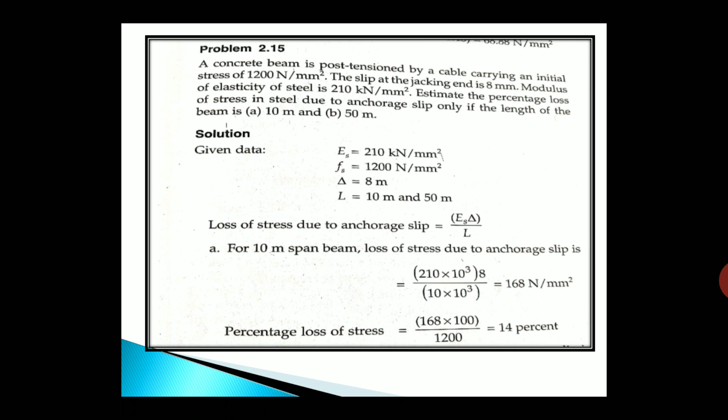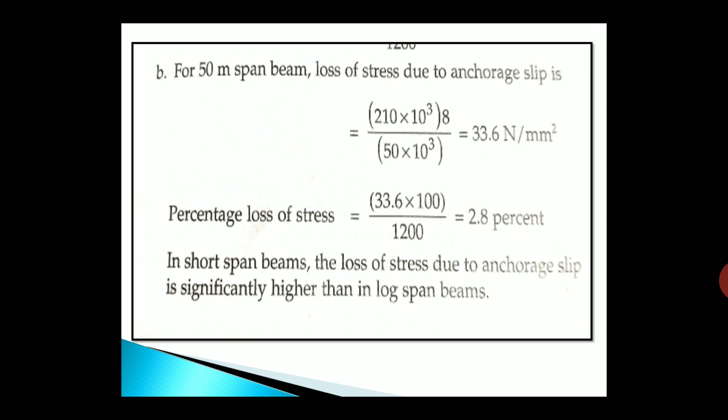We get 2.8%. So from this example, it is very much clear that the loss of stress due to anchorage slip is significantly higher in shorter span beams as compared to the longer span beams. We saw here when the beam length was just 10 meters, the loss was up to 14%, whereas when the beam length was increased to 50 meters, the loss is only 2.8%. So this example I have selected just to prove that the losses are very much higher for shorter length, whereas as the length increases, the loss due to slip decreases.

Now again, this is a different example. Here we have a cylindrical tank of 50 m external diameter, which is to be prestressed. We have prestressed circular water tanks, and this example is related to that. So here the diameter of the tank is 50 meters. High tensile wires of Young's modulus 210 kilonewton per mm square are used.

Then the jacking is done at 4 points. 4 jacking arrangements are provided 90 degrees apart, meaning if you have the circular element, at each 90 degrees you have the jacking arrangement provided. That means the total circle is divided into 4 equal parts. Now this is the important thing in the given example.

If the minimum stress in the wires immediately after tensioning is to be 500 Newton per mm square and coefficient of friction is 0.5, calculate maximum stress to be applied to the wires at the jack and the expected extension at the jack. So what we want to achieve is a minimum stress in the wires immediately after tensioning of 500. Minimum we should have 500. That is a given data, and it's a hint which we are going to use

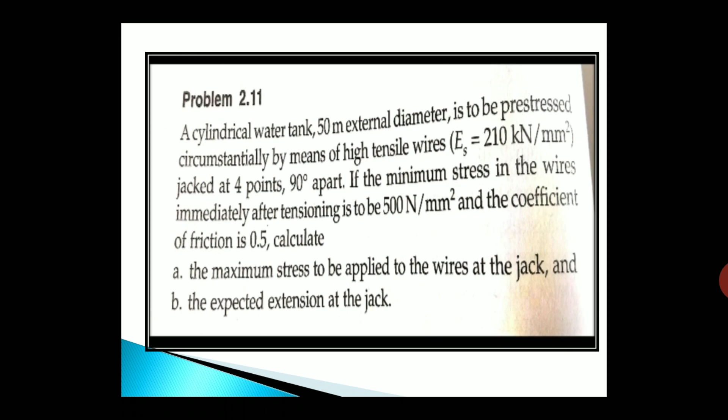That means the initial stress in the wires at the jacking end has to be 1102 Newton per mm square. This is very important. Here you need to understand 500 is not the initial stress, but from the given data, 500 is the minimum stress in the wires immediately after tensioning. So now we have two stresses, P naught and Px. Let us take the average stress, P naught plus Px divided by 2, which gives us 801. This stress we can use for further calculations.

Next is the length of the wire. As it's a circular thing, we have to take into consideration the circumference. The formula for circumference is pi d, and as we have 4 jacking arrangements, we multiply it by 0.25, or divide by 4. The 1000 is taken to convert 50 meters into mm. Therefore, we get the length of the wire as 39250 mm. Now with this we need to find the extension at the jack, which is the other requirement of the example.

We have the formula delta is equal to sigma into L by Es, where sigma is the average stress, which is 801. Length we have found, 39,250 mm, divided by Es, which is 210. I think here a 10 has come extra. Es of 210 kilonewton means 210 into 10 raised to 3, not 10 raised to 4. We get an extension of 149.7 mm. That means the jack will undergo an extension of 149.7 mm. So that is the second answer which we required.

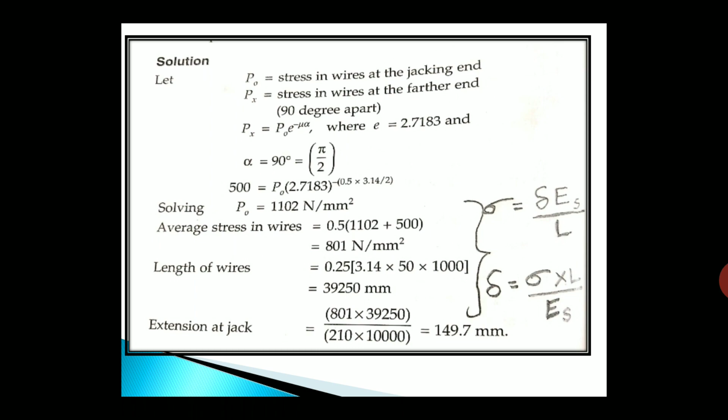So this is a tricky example. If you suddenly come across this example in the exam, you will get confused. The solution is hardly a single page; we only need to understand what is given and what is asked. Here we wanted to find P naught, the stress in wires at the jacking end, and the extension at the jacking end, which we have found. Let's move to the next example.

Now this is a bit bigger example and I rate it as a tricky or difficult example, so let's concentrate. A post-tensioned concrete beam with a cable of 24 parallel wires, total area 800 mm square, is tensioned with 2 wires at a time. The cable, with 0 eccentricity at the ends and 150 at the center, is on a circular curve. The span of the beam is 10 meters and the cross section is 200 by 450.

The wires are to be stressed from one end to a value of F1 to overcome frictional loss and then released to a value of F2, so that immediately after anchoring an initial prestress of 840 Newton per mm square is achieved. We need to compute F1 and F2. Further, we need to compute the design stresses in steel after all the losses are taken into consideration.

So it's a tricky example. We need to understand first what is asked. In the first step, we need to find F1 and F2, and in the second step it becomes a regular example where we have the initial stress. We have to take the given data into consideration and find the losses.

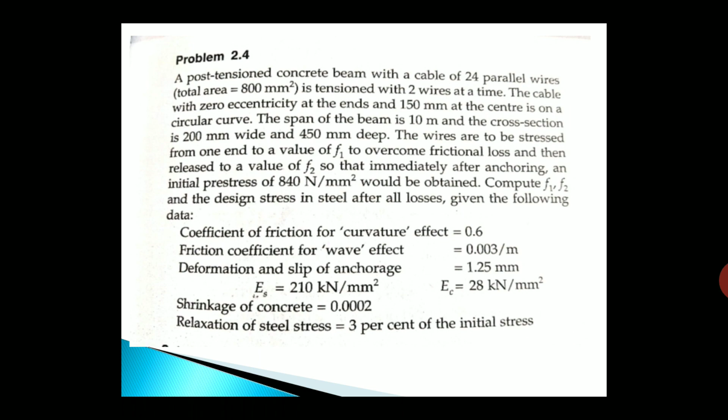Coefficient of friction, wave effect, anchorage, etc., everything is there in the given data. So let's move on to the solution. So a figure is drawn where we have shown the eccentricity; the cross section is also shown. So for this type of jacking, the total change in slope is 2 times 4E by L, that is, your angle is 2 times 4E by L. Substituting the values we get 0.12.

So here, as your alpha value, that is the total change in slope, is very small, we can use the modified formula for loss in friction. In the previous case we had an alpha value of 90 degrees, that is pi by 2, hence we used the first formula, that is e raised to. Here alpha value is just 0.12, hence we can use the modified formula directly.

The formula says loss of pre-stress due to friction is P naught into bracket mu alpha plus K into X. All the values are given, but we don't know the initial P naught. Okay, hence keep it as it is, and we'll get the loss due to friction in terms of P naught, that is 0.102 P naught. This is the first step.

Then loss due to slip is given as 1.25. Therefore, using the delta formula, the total loss due to slip we can find. So firstly, PL by AE is equal to 1.25. Therefore P, that is the pre-stressing force, is equal to 1.25 into 800 into 210 into 10 squared divided by 10 meters, which is the length. So we get the P value as 21,000 Newton.

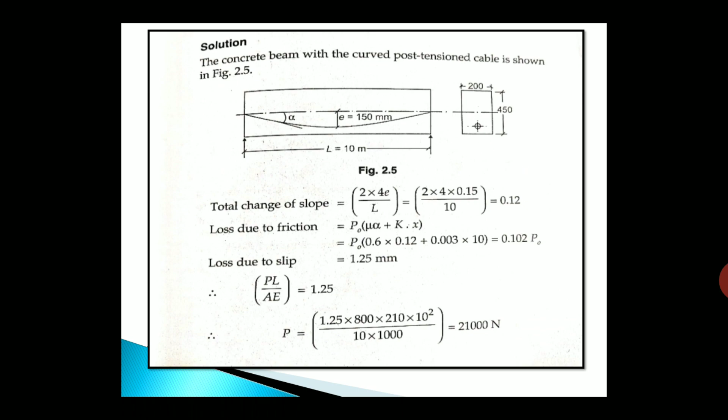P naught is nothing but your F2, okay, which is the stress at the far end, which will undergo frictional loss. Okay, so the most important thing here to understand is what is F2. F2 is the stress at the far end. F1 is the stress at the jacking end.

The stress at the far end has to be such that it overcomes loss due to slip, whereas the stress at the jacking end should be such that it should overcome loss due to friction as well as loss due to slip. Hence, for an initial value of 840, when we are calculating at the far end, it becomes 840 plus loss due to slip only, whereas when we are calculating at the jacking end, it accounts for the loss of friction as well as loss due to slip.

Hence, F1 will be equal to loss due to slip plus initial stress, which is 840. The answer is 866.2 plus 0.102 P naught. P naught value is nothing but your F2. So stress at the jacking end we get as 954 Newton per mm square. That means you have to apply a stress of how much?

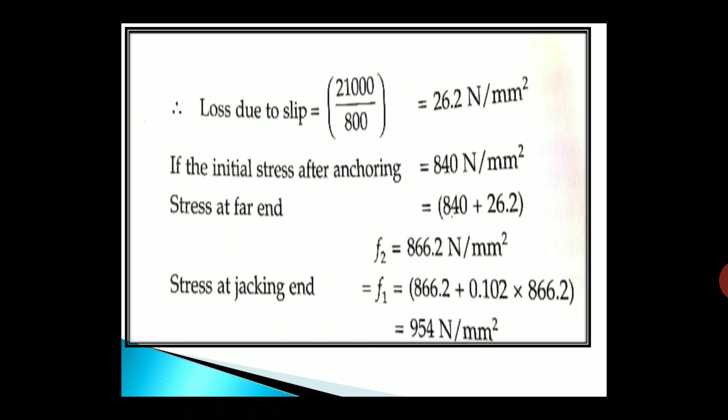Now in the second part of the example, we have to consider 840 as our initially applied stress, as it is given in the data itself. So the other F1 and F2 don't play a major role here. We have to consider 840 as the initial stress which is there in the wires, and just go on solving as we have solved the other examples.

So first step, if you want, you can start with loss due to shrinkage, which is 0.0002 into ES. We get a loss of 42. Loss due to relaxation is given as 3% of initial stress, that is 3 by 100 into 840. Then the total initial force is stress into area, that is 840 into 800, which we get as 672.

Therefore, the stress in concrete at the level of steel at the center span is P by A, where A is the area of concrete here, 200 into 450, plus P into e divided by I. So here e we get as 150. So we get the initial stress, Fc equal to sigma c, as 17.41 Newton per mm square.

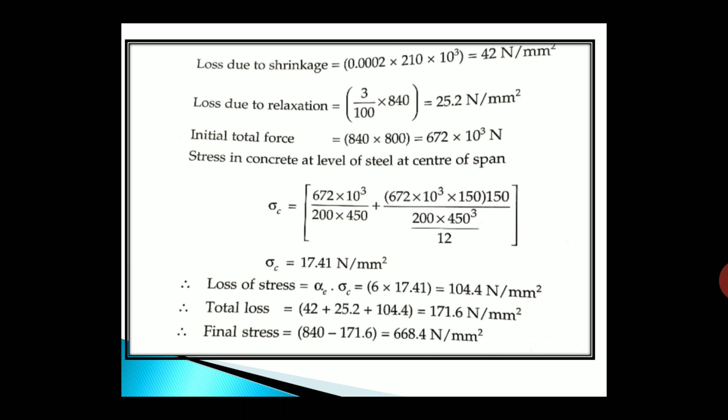So these three examples I hope you'll go through. They were a bit different examples. Hope you'll solve them. So let's conclude for today's class.